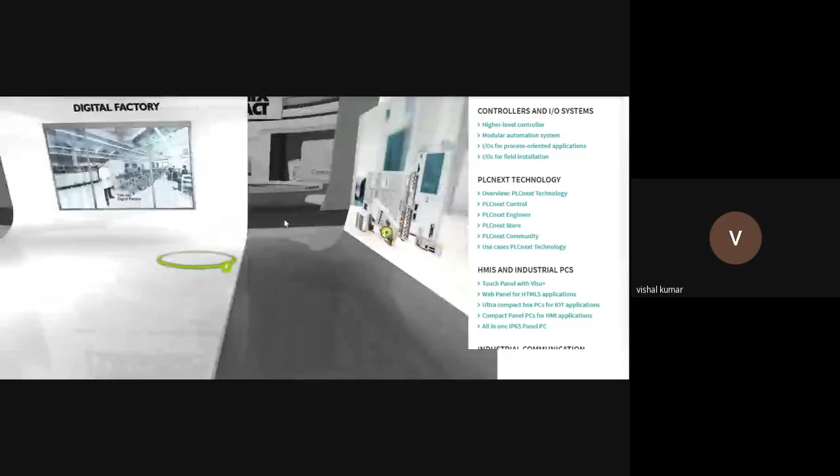So now I will just showcase you some of the basic controllers. I think here on the right hand side, instead of sweeping the mouse pointer here and there, we can use this menu button here to move into each and every subject. So here, first case is higher level controller.

Coming back to your microprocessor based control system, you can just switch on one light, switch off light, or just measure the level, or take some sensor data from humidity or atmosphere, temperature, pressure, thermal scanning. All this stuff you can take in one or two ways with your microprocessors, simple embedded systems.

But if you're looking into a very higher level, like if you want to control an entire plant, or if you want to handle 10,000s of IOs, then you might require a higher level controller, which is called DCS or PAC system. That's really what high level controls are used for.

So this is the controller from Phoenix Contact. I'm just showing you an example of simple controlling. So don't think that with a microprocessor we can do any type of magic. For that you need an industrial grade hardware.

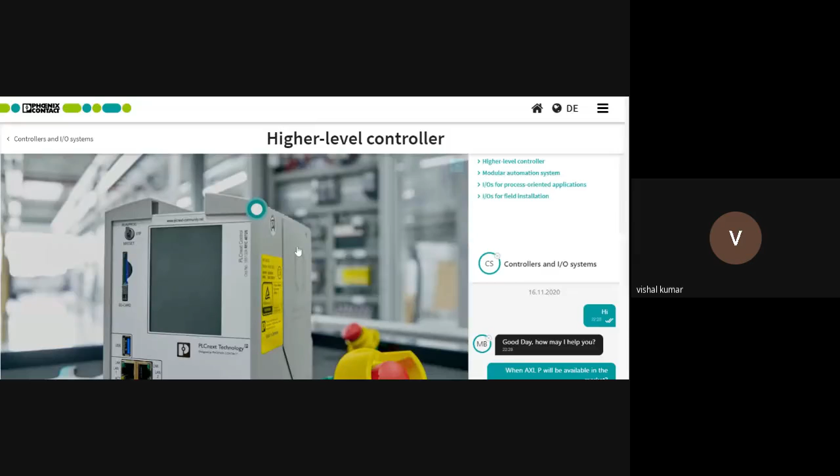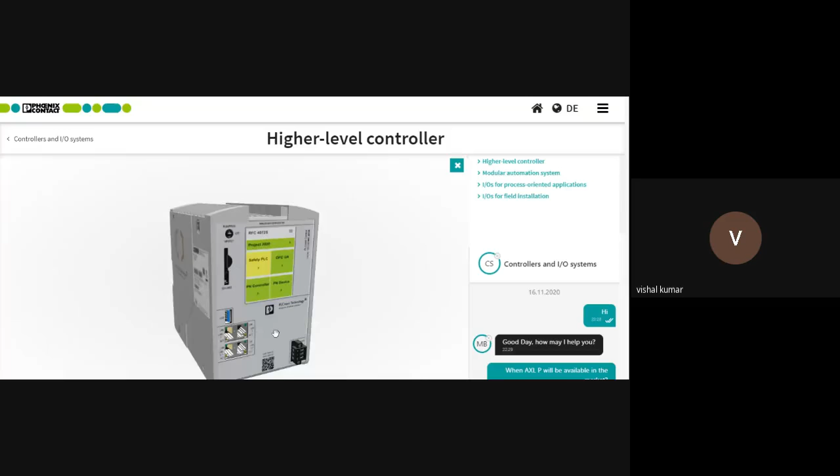Even if the basic area is okay, microprocessor, here you can see the yellow color symbol. This is called TUV. TUV is a certification agency, an international certification agency for industrial hardwares designed for safety applications. Safety means safety integrity level, SIL 3, like that. If your machine is threatening human life, you should control such machines using SIL 3 certified hardware. So SIL 3 switches, SIL 3 or safety PLCs, normal relays, safety relays, safety communication - all these will be approved or certified according to TUV. That's why this yellow color indicates safety.

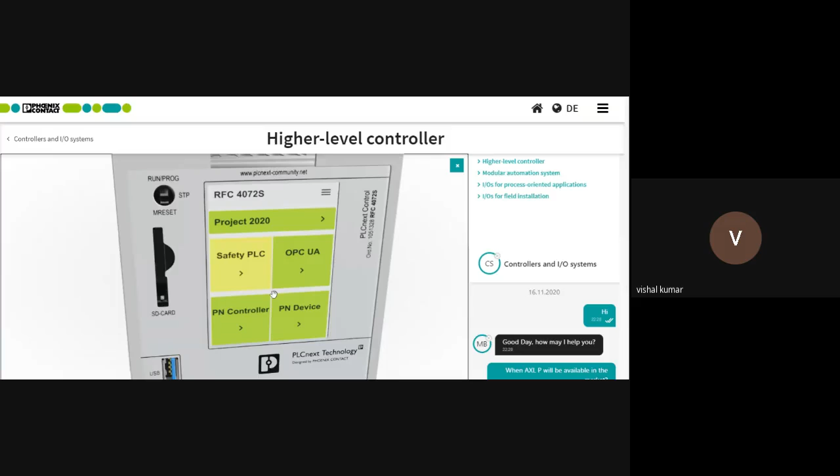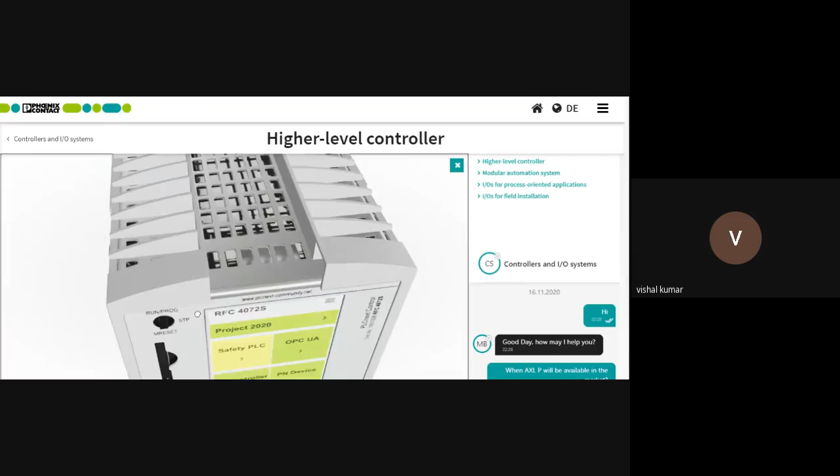So this is actually a higher end controller. It comes with 3 processors. One processor, like i5, you can use for your industrial class applications. Then 2 800 megahertz Altera NIOS processors will be there, which is TUV certified according to SIL 3. That's why on this touch display it's showing a safety PLC.

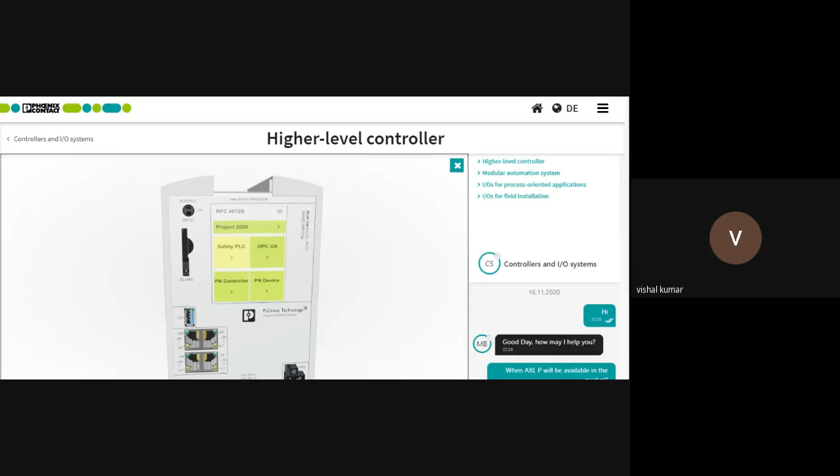Then OPC UA - this is a very important point for students who are going to pass out. OPC UA is the latest trend in the industry now. You might have learned about HART protocol or Namur open architecture - Namur is the latest, HART is an old protocol but still relevant. But all these things are being transferred in one way or other related to OPC UA. So OPC UA is very important in your entire career, and this controller supports OPC UA.

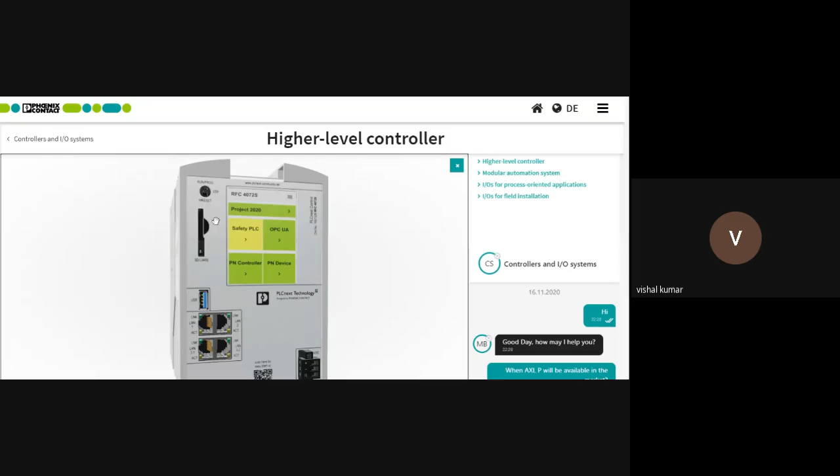You can see here, you can attach fans because this controller supports up to 60 degrees Celsius. If you want to use a controller for 70 degrees Celsius, then your design will change. All these steps are related to your industrial hardware. You can add an SD card slot - but here also you cannot use a commercial SD card or memory card, there are industrial SD cards.

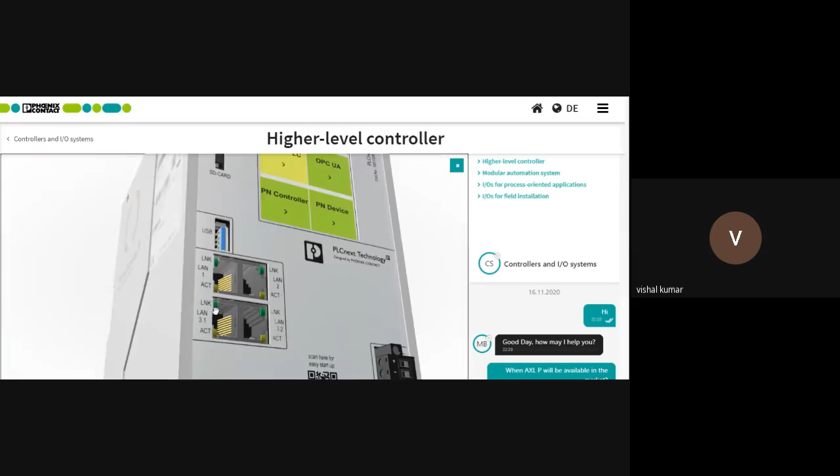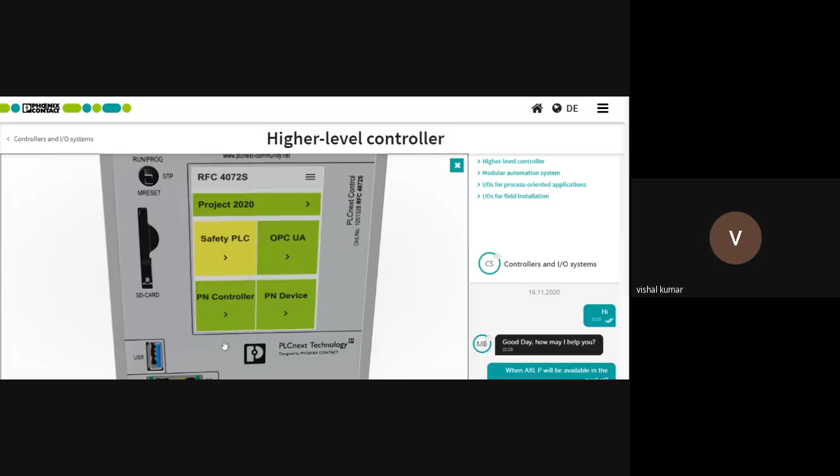And this is actually 4 Ethernet ports. Here you can see LAN 1, 2, 3.1 and 3.2. That means this controller can communicate with 3 different networks in 3 different subnet masks, because you need to keep the same IP in a very huge machine network. So a lot of things are there we need to keep in mind while approaching the industry.

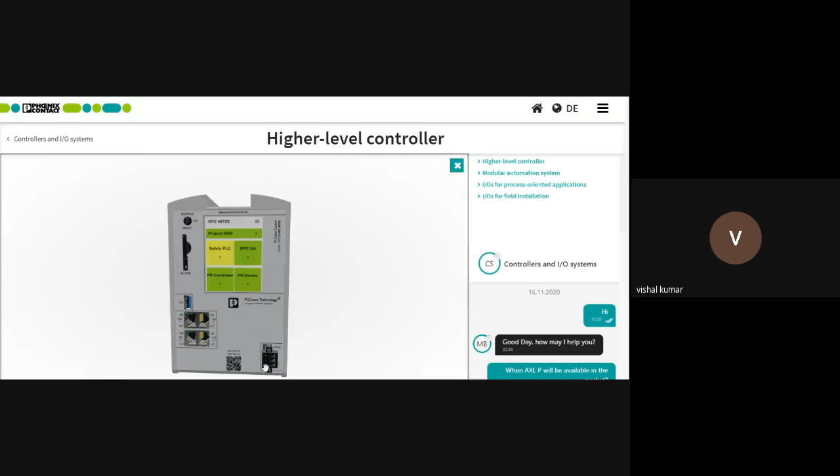It's not a simple microprocessor or microcontroller, but inside a lot of things are there. So here you have seen just a CPU, right? But for taking your field signals, you should have the IOs - inputs and outputs.

So IO cards are separate, different actually. Those IO cards will be mounted on the field, can be mounted in a separate cabinet, or can be mounted along with this controller itself. And those IO cards can be connected to this controller over Ethernet - it's not a protocol, I'm sorry, Ethernet is a medium only. Under Ethernet, you can find hundreds of protocols.

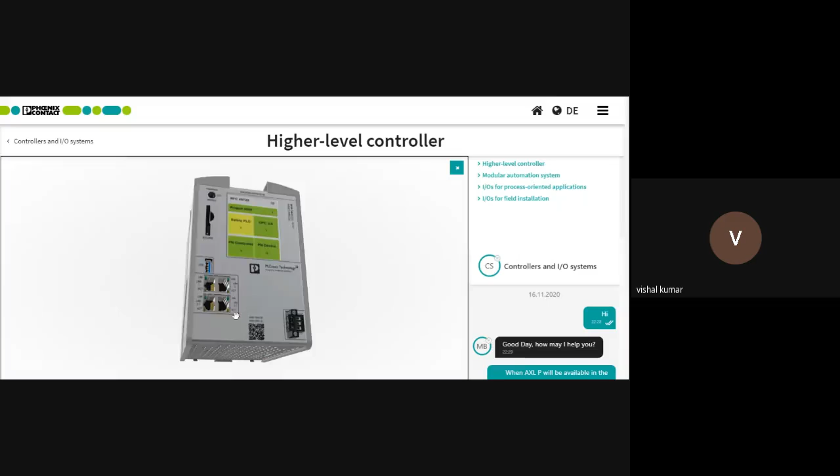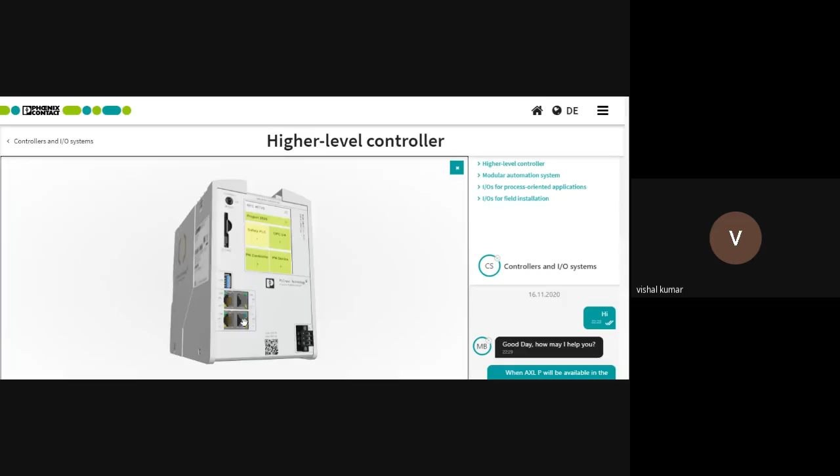For example, Phoenix and Siemens are using Profinet protocol for communicating with IOs mainly, but you have a lot of protocols, including Ethernet IP, Modbus TCP IP, which you are just learning in the OSI model. Those are very important if you want to learn about the product. Modbus TCP IP, RS-232, RS-485, all these you are learning now. After that, if you know the OSI model in detail, then you can know what all stuffs are there in the latest industrial protocols like Profinet, Ethernet IP, then CAN bus, CAN open, EtherCAT. All these protocols will come into picture if you want to communicate or connect your IO cards and your CPU in higher end controllers.

But in medium level controllers, you can attach your IO cards on the right hand side or left hand side, like that, according to the make and model of your PLC.

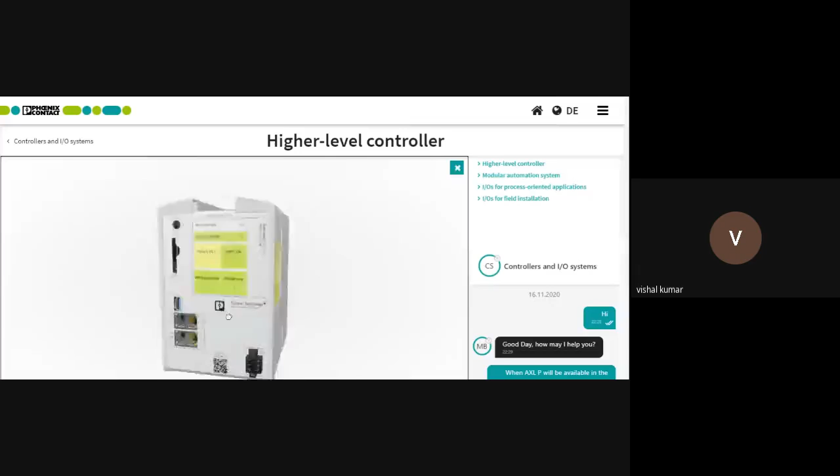So this much is regarding the higher end controller. I'm not just giving theory here. Just to show how an industry, or what all features or things are required in an industry, we will have a look into this brief video, about 1 minute, regarding the industrial application of this particular controller. It's not the only application, but one of the applications this controller can be used for. I'm just checking for that video here. Yeah, here it is.

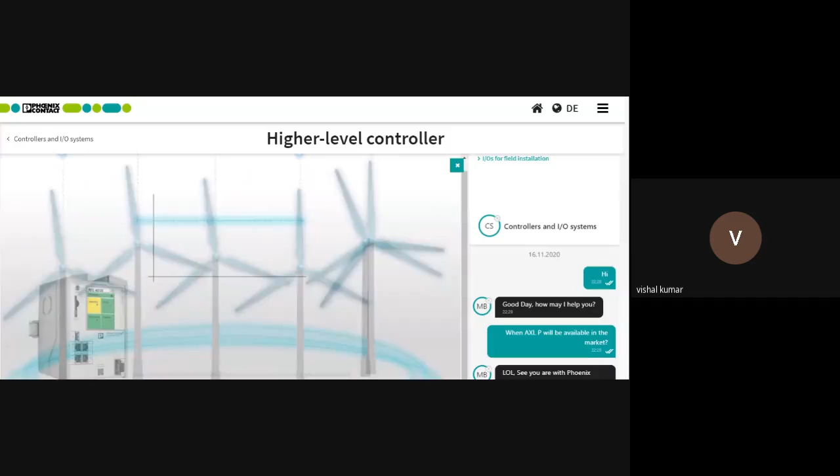So we can have a look into this. This is for a wind turbine. It's a very huge system. A wind turbine is not simple even to look at. So this controller we are mainly using for wind turbines, for controlling, monitoring, and synchronization. These are the energy produced by the wind turbines.

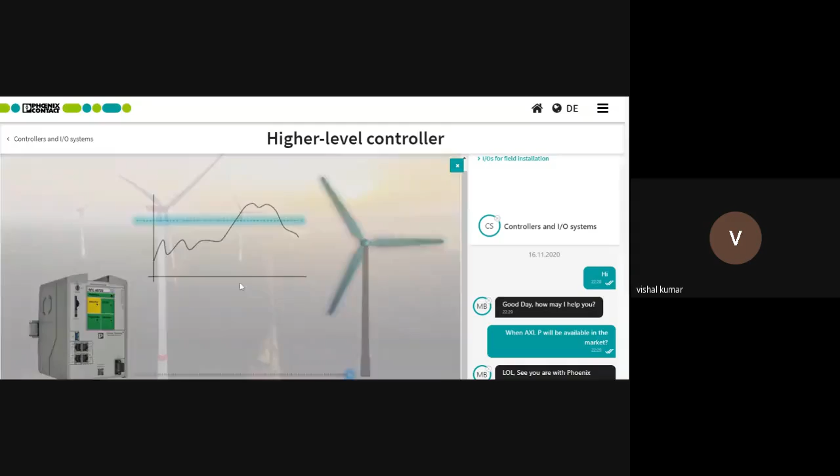Because with embedded level controllers, you use Linux based languages or high level languages for programming. But at the industrial level, you cannot always use those high level languages, because in electrical and instrumentation, the 61131 standard of languages is available. Function block diagram is one of those.

See, this is high level. This is actually based on PLC Next, hence it supports high level languages also. If you want to develop an application, for example, this is actually a synchronization. If you are using a wind turbine, a lot of energy will be generated from the wind turbine or from a solar plant, and you are feeding it to the grid, then the grid needs to be stabilized. So that's just an example I'm giving you.

So there are some algorithms for stabilizing your grid, called grid synchronization or governor synchronization. Like that, some applications will be there where you cannot always depend on the 61131 language. So you need to use high level languages for greater flexibility. You can use high level languages for developing an application or some kind of function libraries, and use that in this PLC Next controller. So you need not stick to the 61131 language for programming a PLC Next controller; you can use high level languages also.

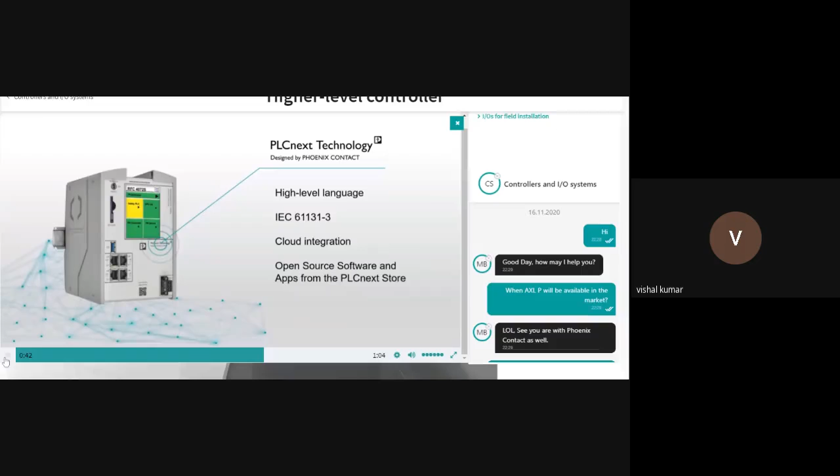Open source software and apps for PLC Next is also another case. I will just give you a brief afterwards.

This is the software - this I thought I'd highlight what exactly it is. You can see 3 processors in a single CPU or single chassis. These safety CPUs mean these processors are developed according to the SIL3 standard. That's how important it is for designing a simple processor and making a simple PCB layout. Safety standards should also be followed for controllers in safety applications. Hence your safety CPU is likely 5 times costlier than your standard CPU.

Standard CPU here you can see Core i5 at 2.4 gigahertz. But if you look at other conventional PLCs that you find in your college labs or normal industries - here around Kerala you can find hundreds or thousands of PLC installations - you cannot find a 2.4 gigahertz processor inside a PLC. You can find maximum 800 or 600 megahertz old processors.

But that's what we are actually doing through PLC Next. PLC Next is much important in day-to-day life because of the high power processors under this safety PLC, along with safety and cyber security. All these steps make this PLC Next based technology more important, which is why we were awarded a patent here.

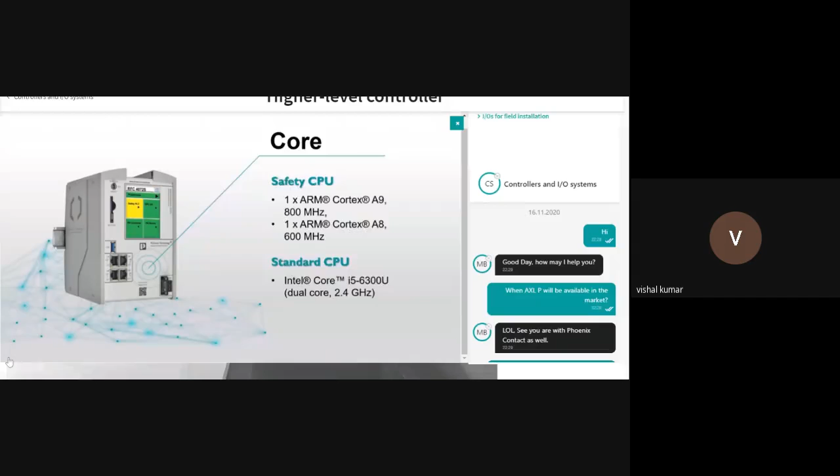Minus 25 to 70 degrees Celsius - all embedded systems are designed for room temperature applications. If you're looking at field level, you can install the temperature sensor here, and you can do this type of thing for your college mini or main projects. But that's really not at all required or considered for industrial grade applications because of this temperature range.

Then ProfiSafe, it's a safety communication. Even the backend of all this communication - the backbone is our OSI model only. This presentation layer, application layer, all this - if we rearrange it, we come to this industrial grade communication, but that stuff is also there. So you should search for the latest industrial grade communication protocols, then start relating your OSI model to these communication protocols. Then the rest of the life will be easy.

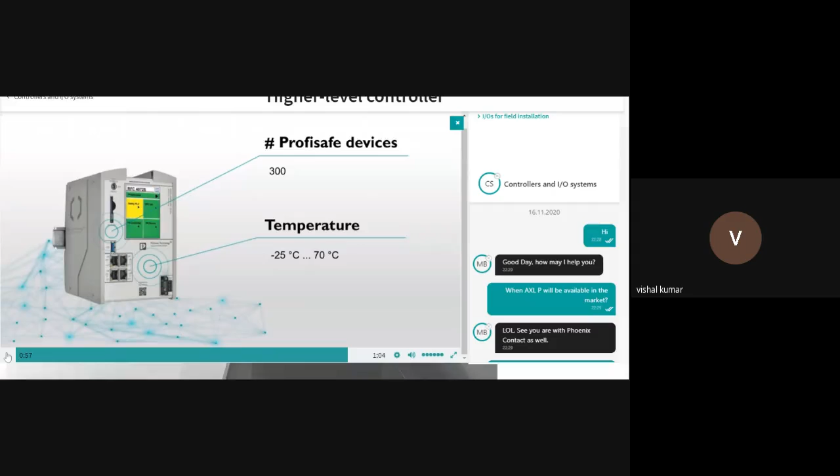So this much is regarding this higher end controller. We will now have a close look into our IOs. I'm not taking you into modular automation systems in detail, I will just brief you on what exactly it is.

Modular automation is also an upcoming trend. You can find industries - if you take the case of Cochin refinery or FACT here - those industries are more than 40-50 years old, and there you can find a lot of old devices, huge installations worth rupees 1,000 or 10,000 crores. For the latest technology, cloud integration, IoT based applications, or better analytics, you cannot change those installations. So we come with a system called modular automation, which is integrating your old technology with new systems.

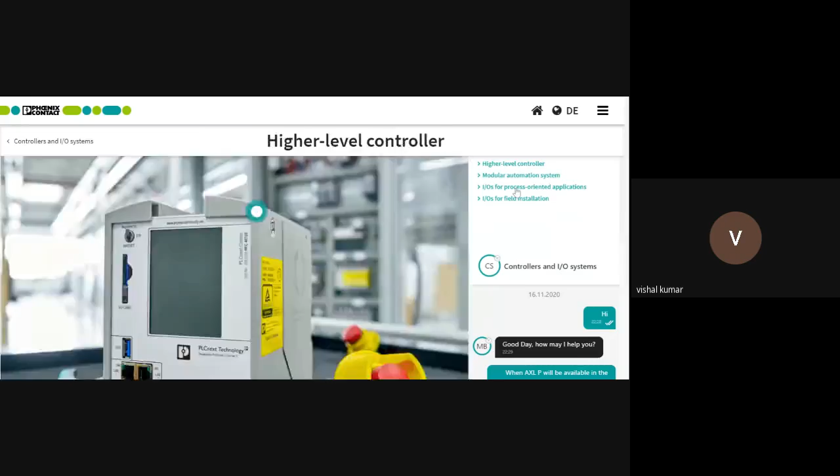For that, you need to support almost all communication protocols, since communication is the backbone of these kinds of activities or any industrial control system - multiple communication protocols in a single system. That is the beauty of this product, PLC Next, which is why we use it for modular automation. But I'm not explaining that in detail because there are certain limitations for you to understand it fully. I will just give you a close look into our IO systems.

Have you ever seen IO cards? I'm relating these to embedded systems because you're more familiar with embedded based controllers, where you see small pins and such. But those IO cards are actually developed into much bigger IO chassis because of industrial grade requirements.

You cannot give more than 5 volt or 15 volt to your embedded controller, but these IO cards support 230 volt AC, DC, 110 volt DC, or 24 volt DC. A lot of electrical vibrations, mechanical environments, and ambient conditions need to be considered while designing your IO system. So this is your IOs.

This is your PLC here. PLC is not our higher end controller, it is a medium level controller. On the right hand side of the PLC you can see the IOs attached - these are the IO cards. Different types of IO cards are available with different chassis according to the ambient conditions these IO cards are intended to be used.

So a wide range of IOs you can see, but this is just an example of those stuffs. I will just have a look into the 3D view, because IOs are very important if you are dealing in industry.

If you go into Indian Oil or Cochin refinery, you can see hot swappable IOs. You can do any sort of activity with an IO in live condition or during power up. So that's the advantage of hot swappable IOs.

I'm really sorry, it's taking much time to load the 3D image here, might be because of network glitches.

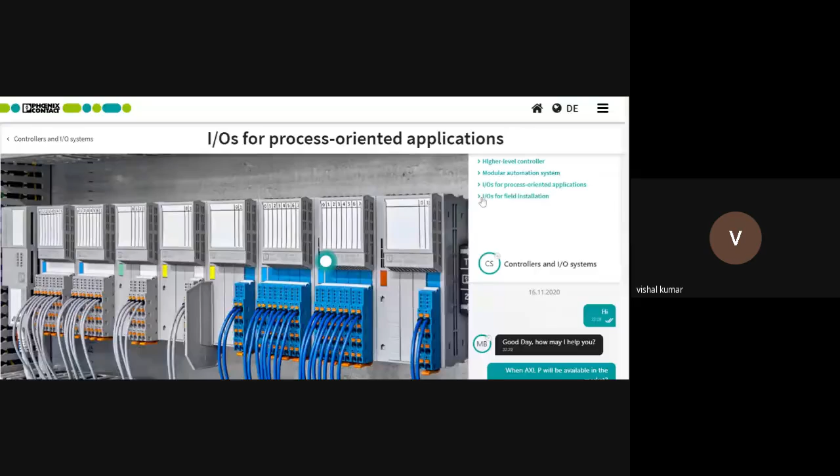You can see a lot of panels, electrical panels - inside a panel only you can mount it, that's why it's called IP20 protected, 20 certified. If you want to directly mount your IO card into the field, then you need IP65 or 67 certified IO card. This is for that - you can directly mount it in any of your applications.

I will take you through the video of the same. Let's hope for an easy play here. So this is actually how it looks.

It's industrial grade. All these ports are actually IO signals. You can take a wire from here, give it to a transducer, for example a pressure transmitter. The pressure transmitter will give a 4 to 20 milliampere analog signal - for example 0 to 100 pressure will convert into 4 to 20 milliampere, and then give it to this IO card, to this particular port. From here we take the signal and give it to the PLCs.

Okay, this is just an example. I will show you the video of this.

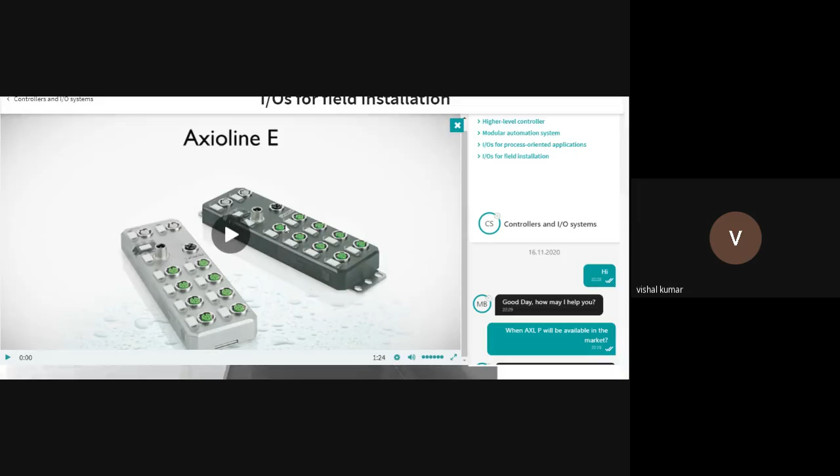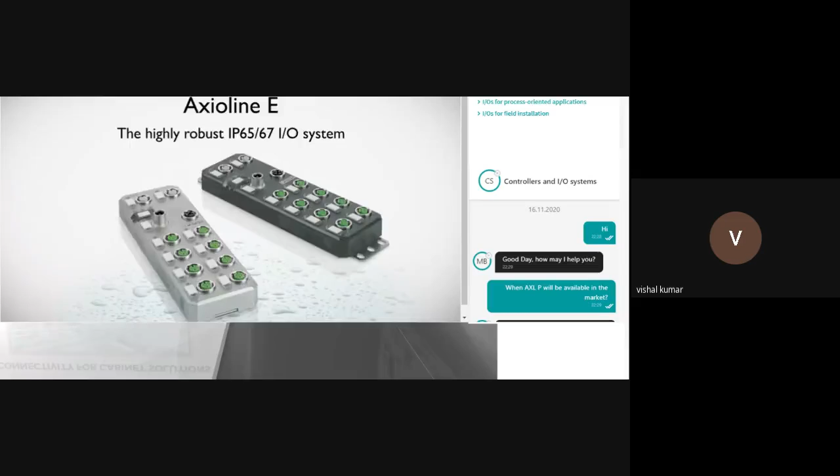This is called IP65 or 67 certified IO cards, a very robust one. You can mount it in any of your applications on the field. You can spray water, water splash is also possible. Minus 25 degrees Celsius it will support, so you can mount it in any of the terrains.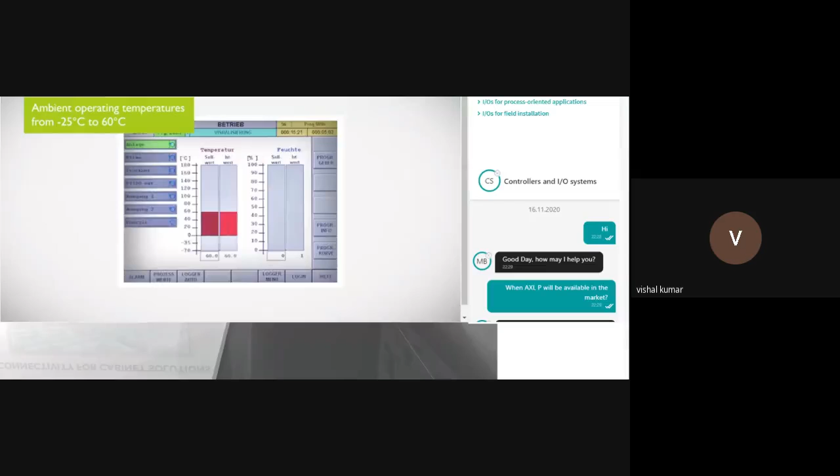So this is actually a different terrain. Even if the chassis is not in good condition, the IOs are still working. We have taken this snap from a real working example.

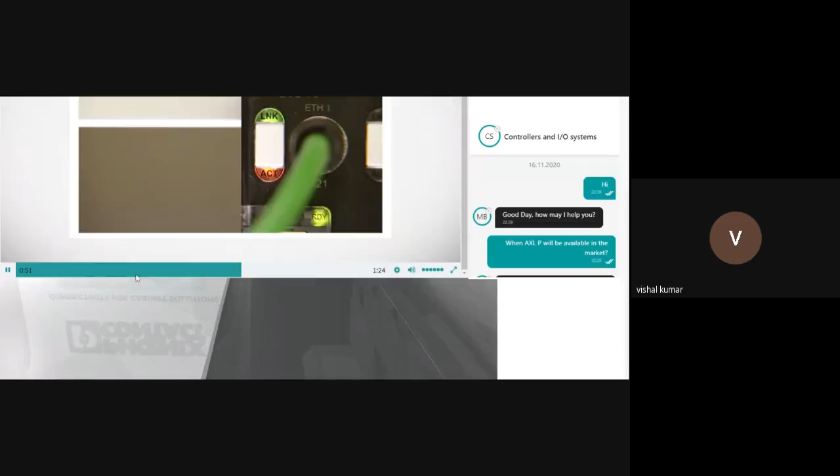See, this is the communication cable. Let me pause and show you. See, ETH1, this is an Ethernet cable. You've seen Ethernet cable with RJ45, right? That's just one form, but this is actually an M12 based connection. A lot of industrial connections are there. This is the Ethernet cable we use for harsh environments.

Not us, the industry is using this for harsh environments, not just Phoenix Contact. This is with a round M12 connection. Ethernet is there, so the link is activated. From here, the signals go to your PLC. This will be mounted in the field.

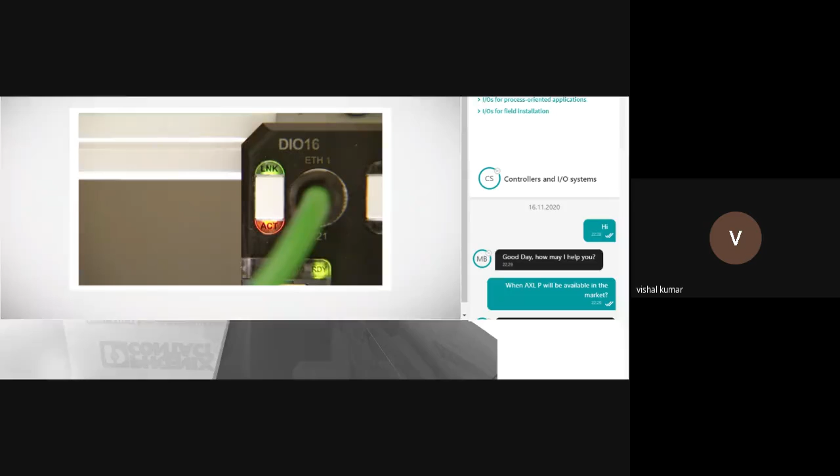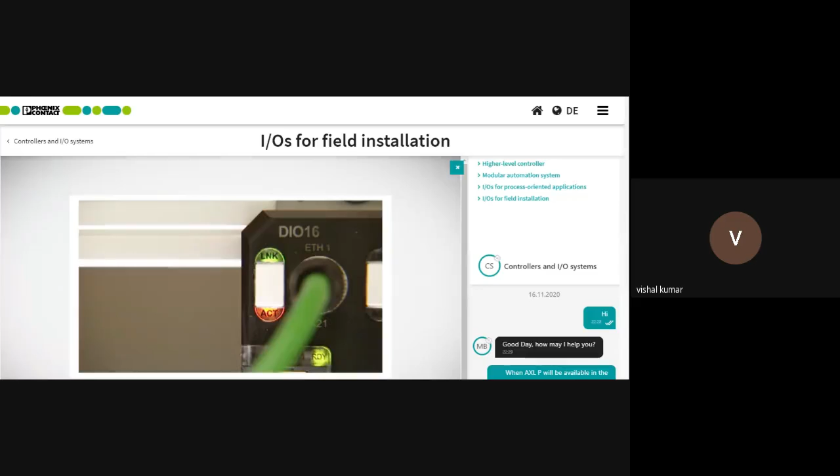You can find this type of Ethernet connection in the railway industry, mainly in trains, especially the latest ones. In India, the railway industry is the main industry creating heavy vibrations and mechanical shocks. Hence we suggest this type of IO cards or Ethernet connections to the railway industry in India. You can also find industrial PCs and HMIs specially designed for railway industries to withstand these heavy vibrations and shocks.

So now I will take you to the industrial PCs and HMI section. That's best here, because I'm also a bit confused. Within this limited time, I need to cover this so it's more understandable for you. We have around 4 to 5 minutes left to discuss the remaining part, then I'll take you to the digital factory.

Here the main attractive point is AIO IP65 - IP, as I already told you, means ingress protection. So we have IP65 panel PCs. You've only seen commercial grade PCs used in labs, but a lot of industrial PCs are available with a wide range of application areas.

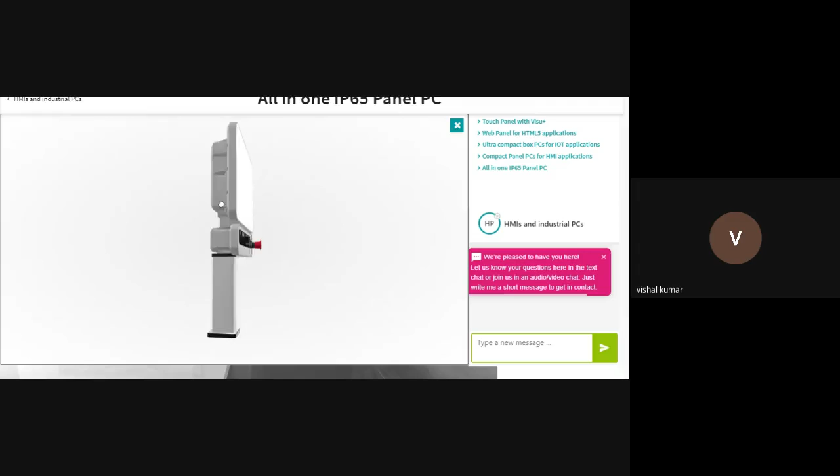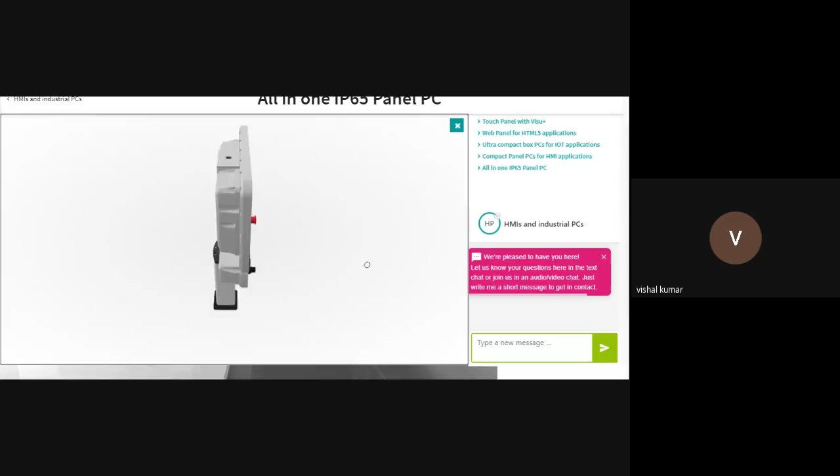See, this is an industrial PC. You cannot see a separate CPU cabinet, because the front side is the display and the back side is the CPU part - it's an attached unit. This is called a panel PC, which you can easily mount into a panel. It can be used at 60 or 70 degrees Celsius, with heavy mechanical vibration and shock.

Since it is IP65, you can spray or splash water on it, even high pressure water, like in vehicle service stations. Hence it's called an industrial PC. It has push button accessories and emergency shutdown buttons. All cabling enters through this pole if mounted on a pole. If mounting only on a panel, you can remove the bottom part and mount it using VESA mount, or other mounting options are available. That's the main attractive point about industrial PCs - you'll find a lot of applications once you start your career.

Let's have a look at the video presentation of this industrial PC. I'll explain in between. The AIO 65 series all-in-one PCs are panel PCs. See, this is without the pole - IP65 protection for use in...

See, here you can see which industry this is. Just by looking, you can see none of your industries look this clean, because this is a clean environment industry where you manufacture food and pharma - food, beverages, and pharma manufacturing happens in a clean room environment where you cannot even enter without proper PPE kits and a mask. So this is the clean room environment application area.

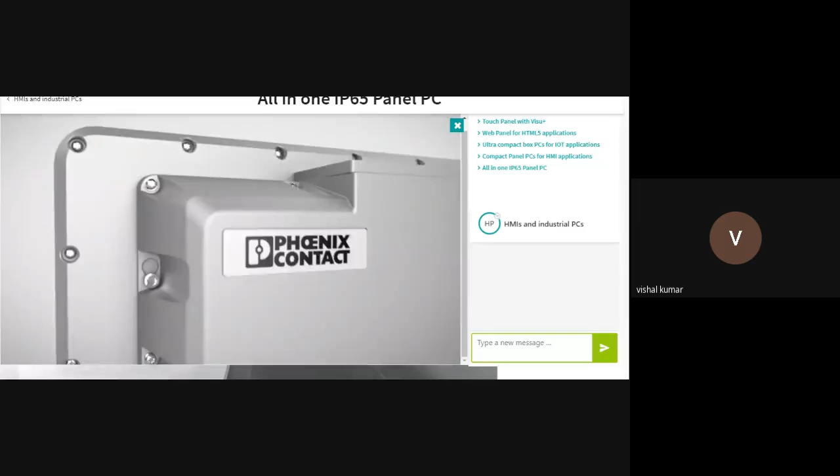Thanks to its compact aluminum die-cast housing, robust touchscreen for operation with gloves, a protected USB port, and cabling on the inside, the AIO65 is the ideal standalone panel PC for harsh environments.

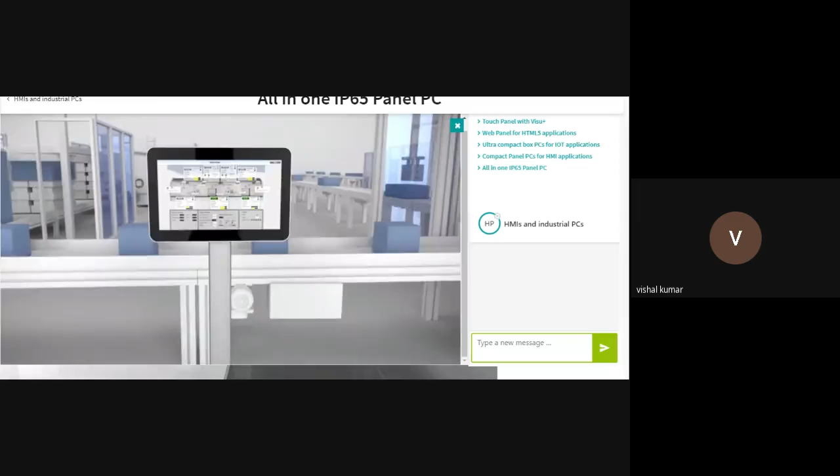Choose the panel PC that perfectly suits your application from various sizes and performance classes. The panel PC can simply be mounted on the wall, on a support arm, or on a stand. This is called VESA mounting. Extend your system with a signal tower and an expansion box. This tower lamp features alarms with IP65 protection and signaling, without exposed cables.

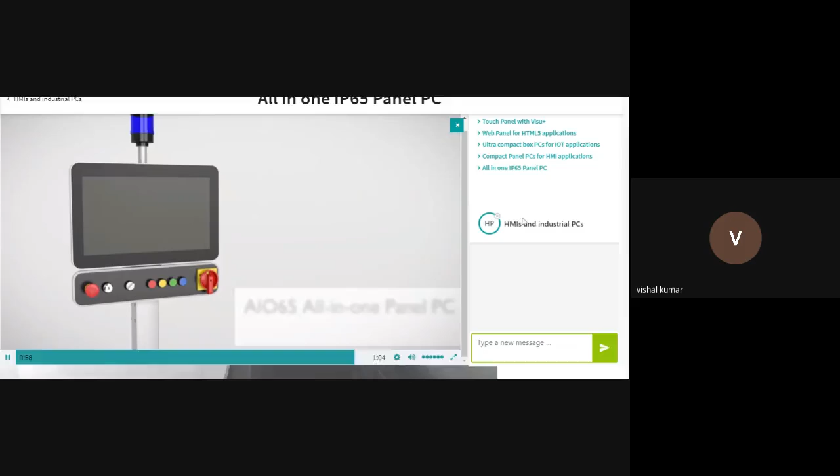Then you can see a lot of touch panels, HMIs, and all this stuff, but I don't want you to focus on that. My interesting point here for you is this box PC. Now we have seen the panel PC. Here it is actually a box PC, which is called only CPU without a display.

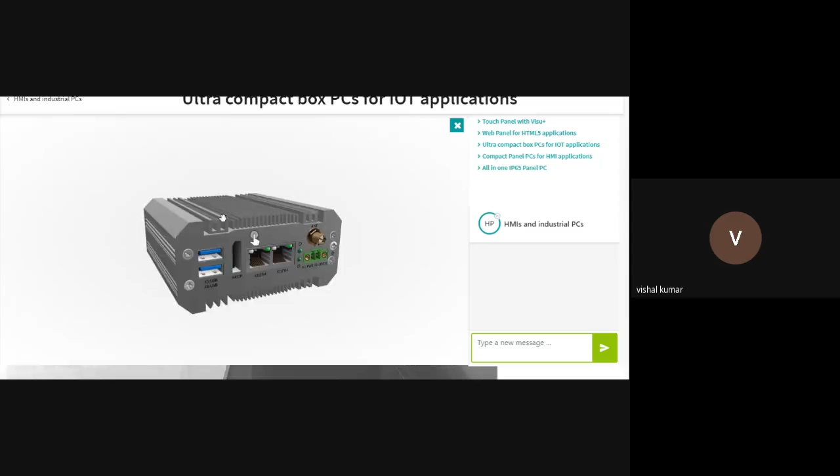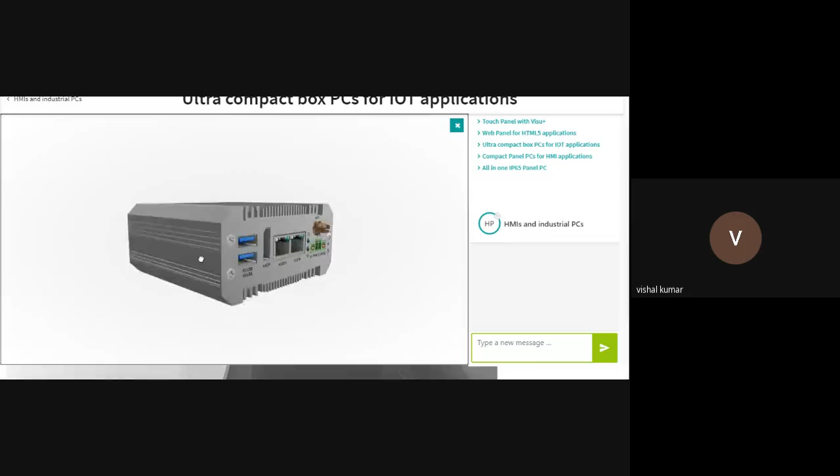You have seen your commercial PC cabinet, how bulky it is for an i7 or i5 processor in your PC labs, but actually in industry we are trying to maximum reduce the size. So this is actually a very compact box PC. You can mount it in a small junction box, the size of a first aid box in your bus, which is actually very small in size. So in those small cutouts or footprints, you can mount this type of box PC. This is called compact box PC.

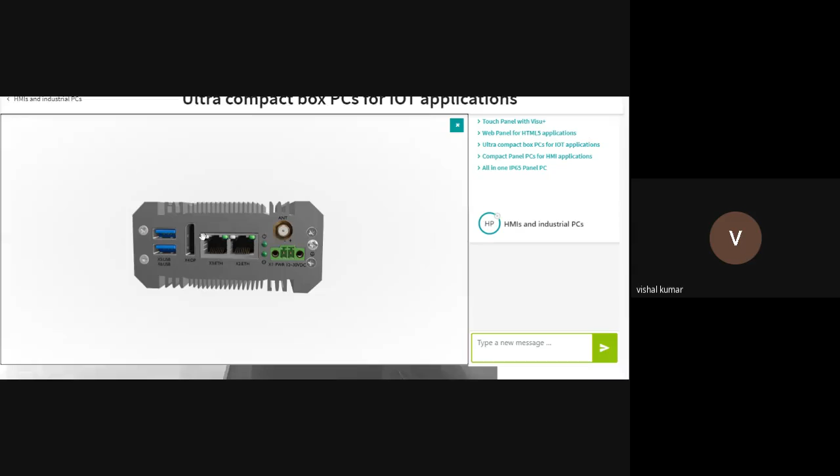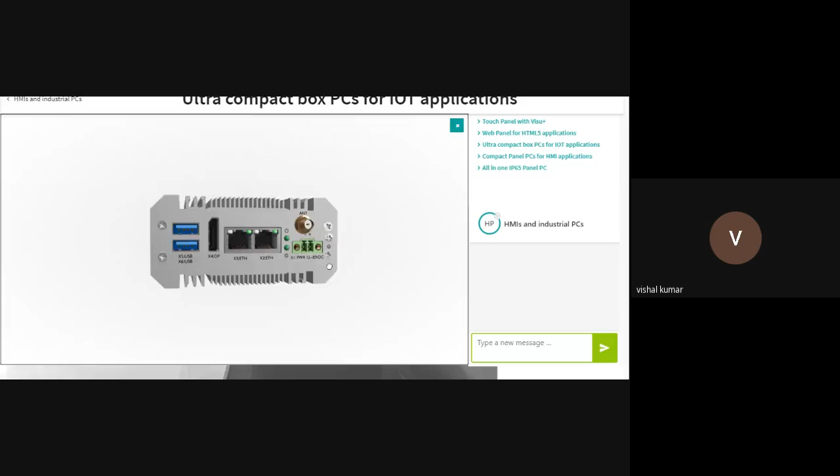Phoenix is a market leader in this PC manufacturing. You can see this external antenna is there. You can mount an antenna and use it for any type of IoT application. You can install Linux OS into this and make use of it for any purpose, or it can act as an edge device. That is the advantage of this box PC.

I thought I would just show you this type of very compact or very small box PCs, SMPS. A lot of stuff is available in the industry, so you can easily learn those.

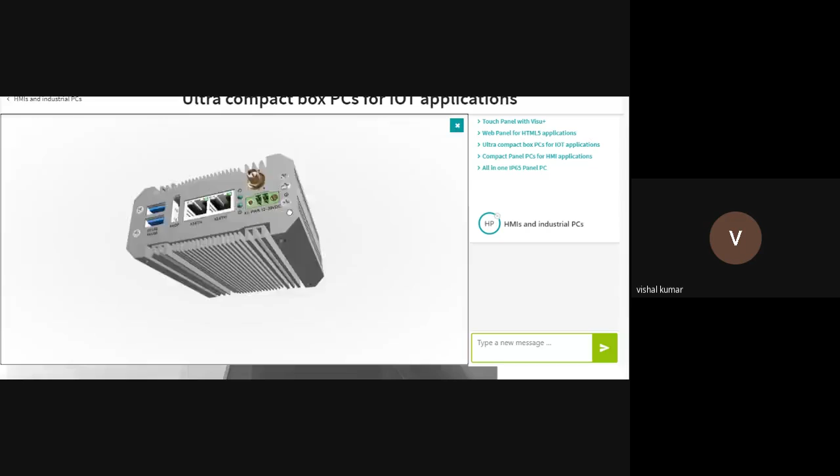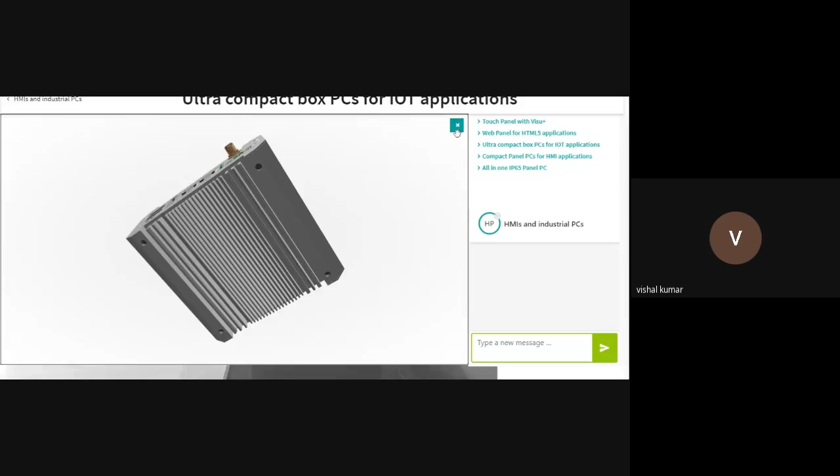So from box PC, I'm just taking you back to my PLC Next topic, because otherwise I will miss covering that part.

So how to come out of that? They are working on IoT development, cloud-based application development, or C++ programming isn't working in their controller - how to do that, or please help. So all these types of things are available in this PLC Next community. I'm recommending you register in the PLC Next community so that you will get a complete idea of everything I discussed here, and you can raise your questions there. You can straight away ask your questions, and our direct expert panels will be there to support you. So let's have a look into the PLC Next community video, where you can get an overview of the community.

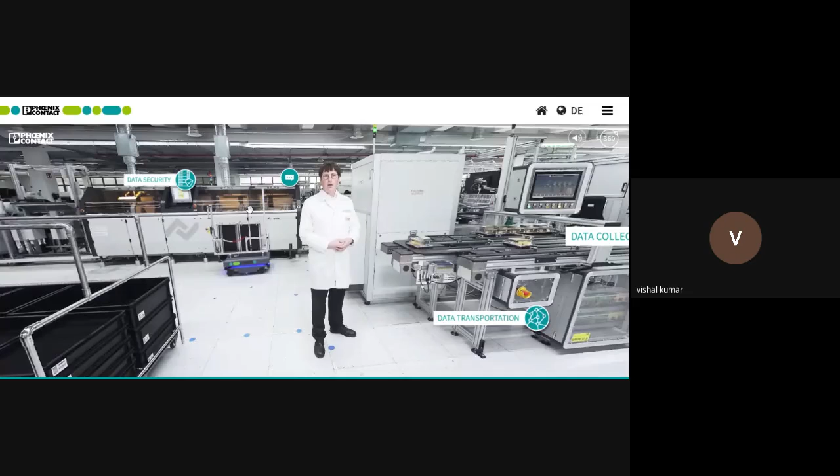Let this audio complete, then I will take you to that. I don't have the permission to stop it now, so once it's finished, I will just take you to the factory.

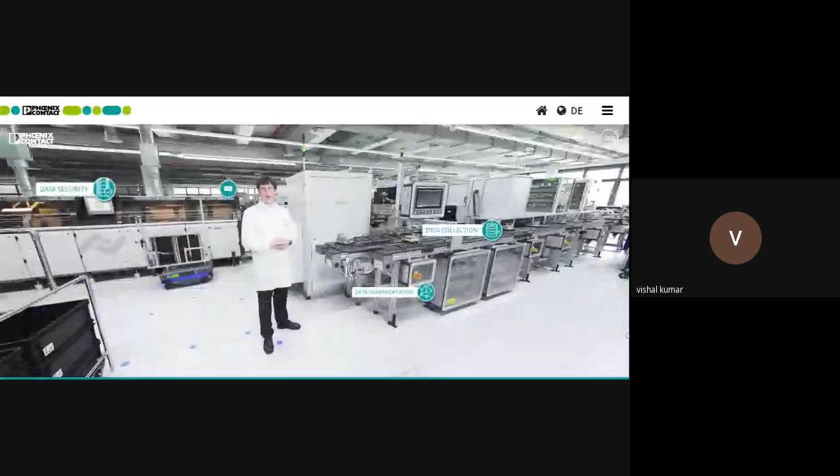In the last 1.5 years, we achieved an increase of productivity by more than 10%. Here in our factory, we would like to present and share our findings with you. Of course, we are not at the end of our...

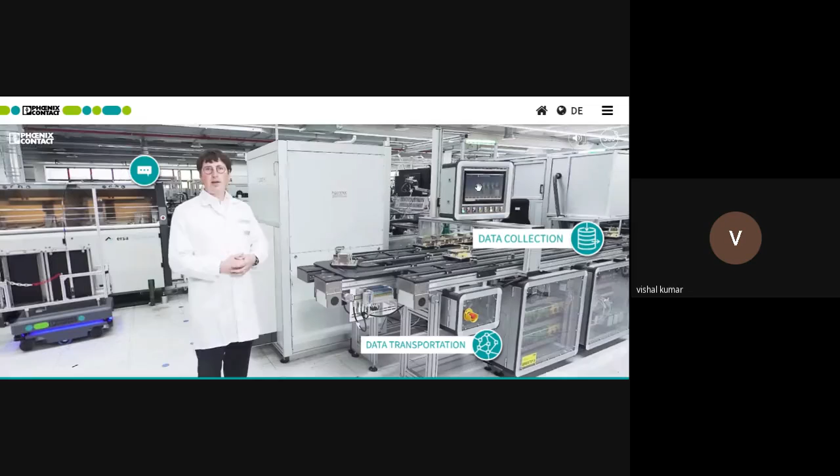See, these are the controllers being manufactured and moving through the conveyor belt. Here you can see the industrial PC, how it is mounted, along with the industrial PCs and push buttons. Then if you look here, these are called AGVs, automated guided vehicles, for your warehouse automation.

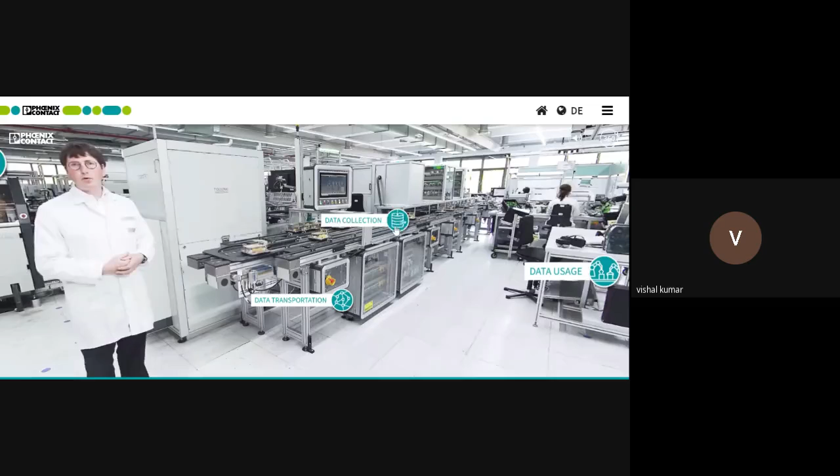Here, data security is in place - your industrial communication should always be secured enough to handle cyber threats. Then data collection happens using different sensors. Now his audio got stopped, but I think I am still audible to you.

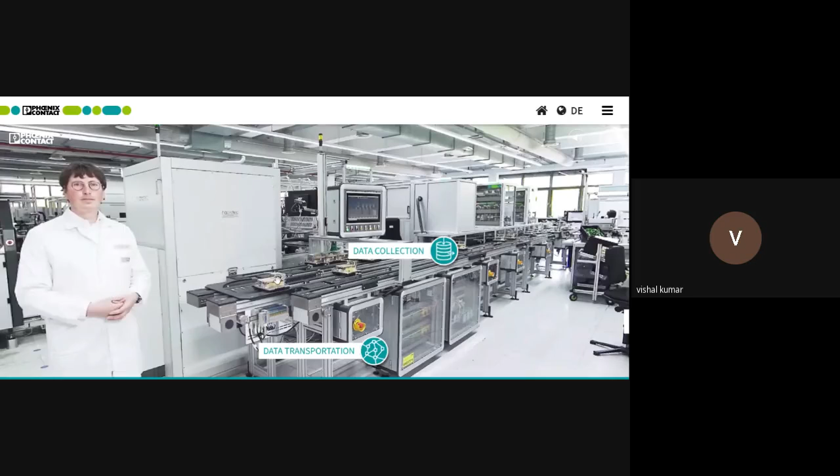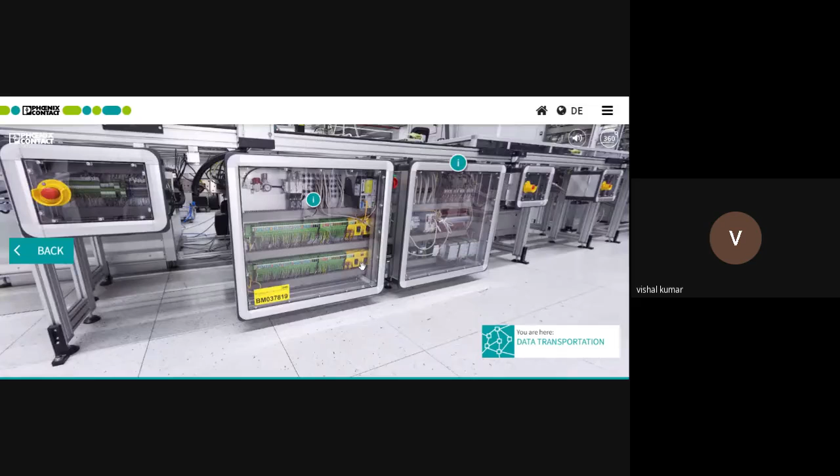Here you can see the long conveyor belt where the products are coming from. The data collection is here, where you can collect data from your sensors. Then you can see the data transportation - let's have a look into that. This is the data transportation area, where you take the data using sensors. Small sensors are mounted here, analog, digital, a lot of sensors are there.

Since it's actually a moving machine, you can see these yellow color systems. This is a perfect example of what I can explain to you. This is the controller I showed you in the beginning of the presentation, a higher level controller.

You can see a yellow color cable going from here to here. All these green color IOs are your standard IO cards. In my presentation you saw gray color modules, but this is actually green. Green is also a different variety of IO cards we use. Then this yellow color - these are SIL 3 certified safety modules used for safety applications of your machine, because the machine might have different outputs and IOs. So there are standard IOs and safety IOs.

Safety means maybe a moving particle or moving part or the blade of the machine that might be controlled. So safety should be there, and those controls we handle through the safety module.

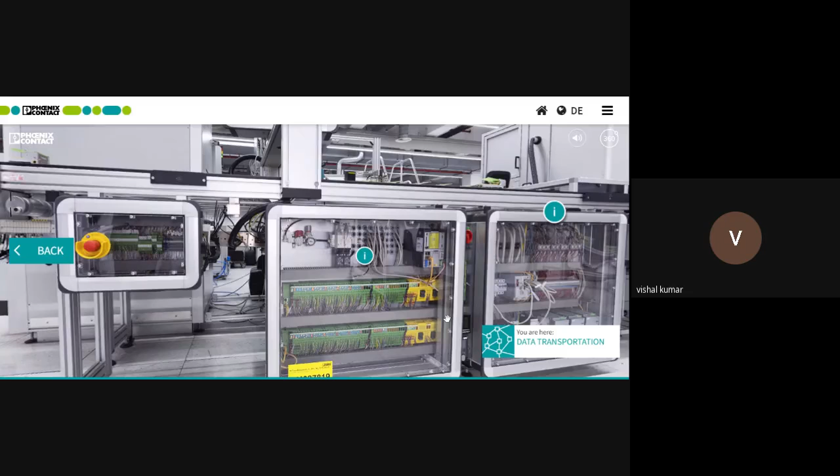Here you can see cable entry points, then these push buttons, then these are relays - but very slim relays, not bulky as you usually see. Here is the industrial PC mounted.

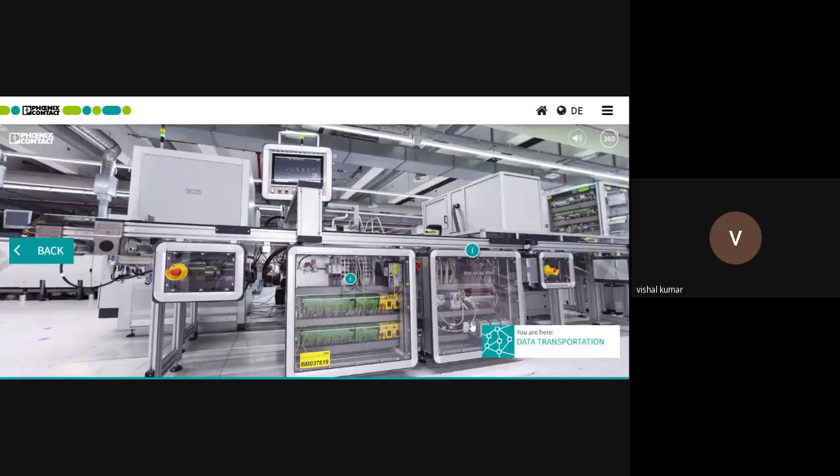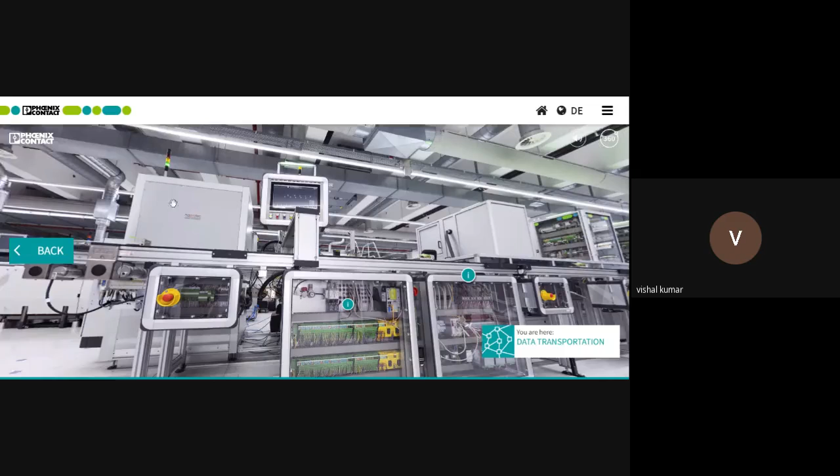This is just a short view of your industrial or plant floor, we call it. These are the panel or cabinet lights, tower lamps it's called. Tower lamps are used for alarms, routing and indications.

So we'll just go back. This is the transportation, data transportation area. Let's have a look into this data collection here.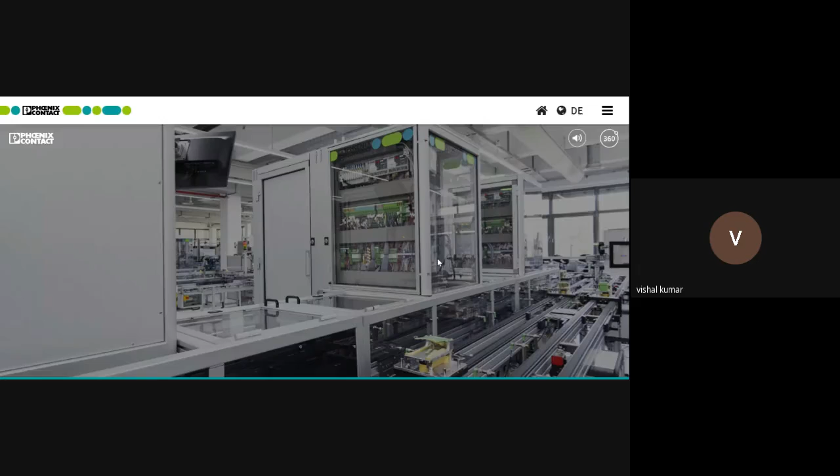Here also you see, this is one type of Ethernet switch. OT plus IT equals IoT - operation technology plus information technology. That is exactly what IoT is. But I cannot explain the complete detail of IoT right now.

What is more relevant for you is these are different types of Ethernet switches with VPN connections, or cyber secured Ethernet switches. Then you can see the data collection area.

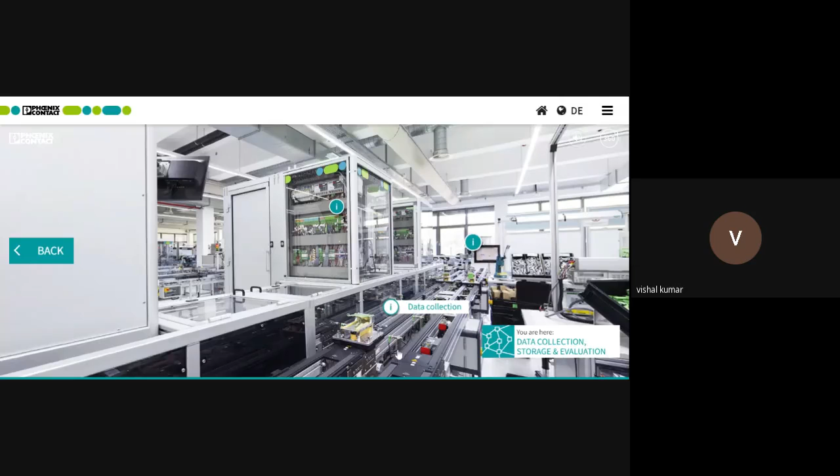These are called proximity sensors, mounted here. This will count your material, give some other readings, and you'll find weigh machines or weighing sensors available. Also, while manufacturing, temperature sensors are available - a lot of sensors are there.

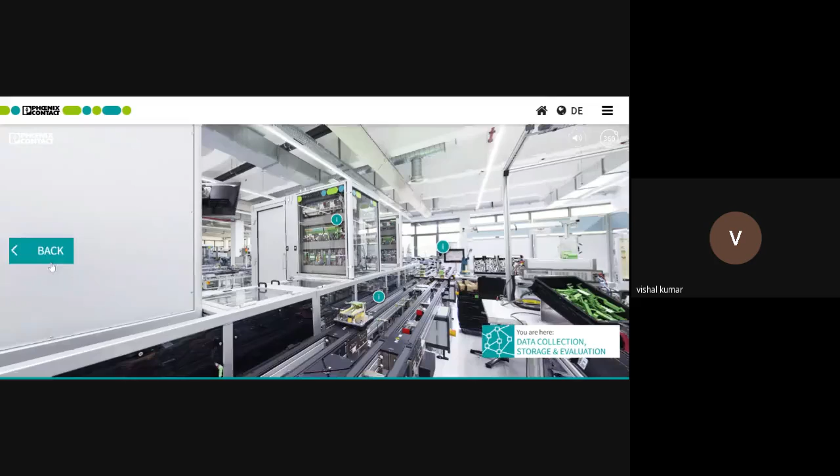So these sensors will go from here, this cable will go to your IO card, and from the IO card it will go to your main PLC. Here you cannot see a PLC because all these IO cards are communicating with your main controller over Ethernet based protocols.

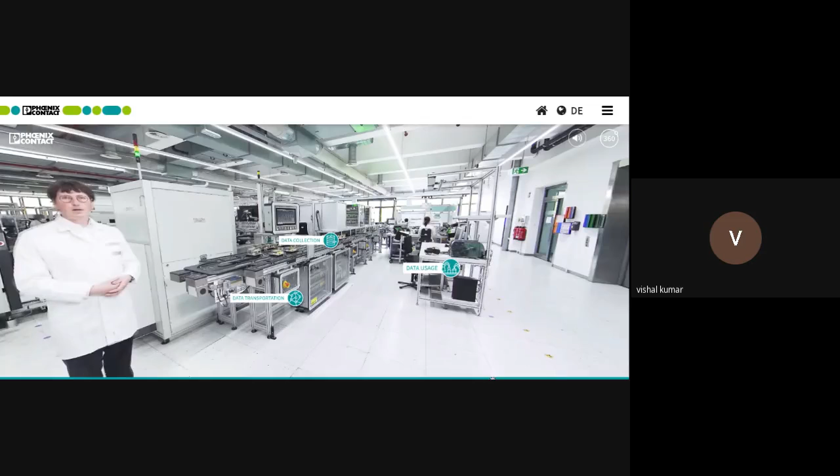So this much is regarding your data or digital factory, because I don't have enough time to take you through all of that according to our time slot. So we are coming out of this digital factory now, going back to this virtual exhibition stall where we started our journey.